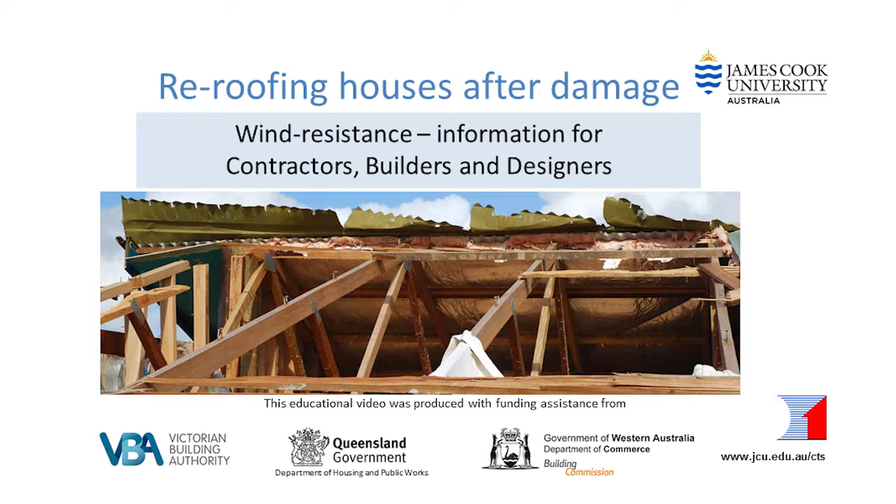Hello. This video gives some guidance on replacing roofs that have been damaged in a wind event in any part of Australia. In almost every case where the roof has been damaged due to wind, the primary cause is more to do with the weakness of the roof and the roof structure than the strength of the wind itself.

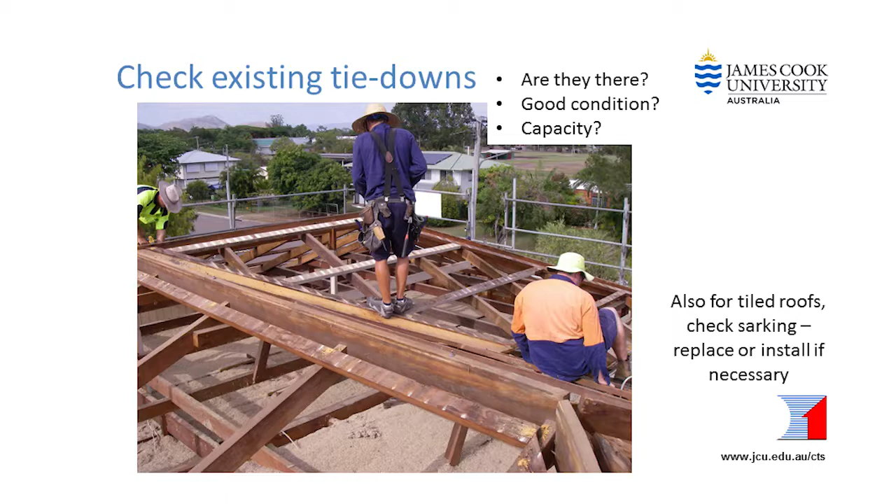So after the roof has been damaged is the perfect time to have a look at what is underneath the roofing and make sure that all the tie downs will do their job properly next time the wind really hammers that roof. If the roof hasn't performed well enough already, there's no point putting back the same details. It has to be upgraded.

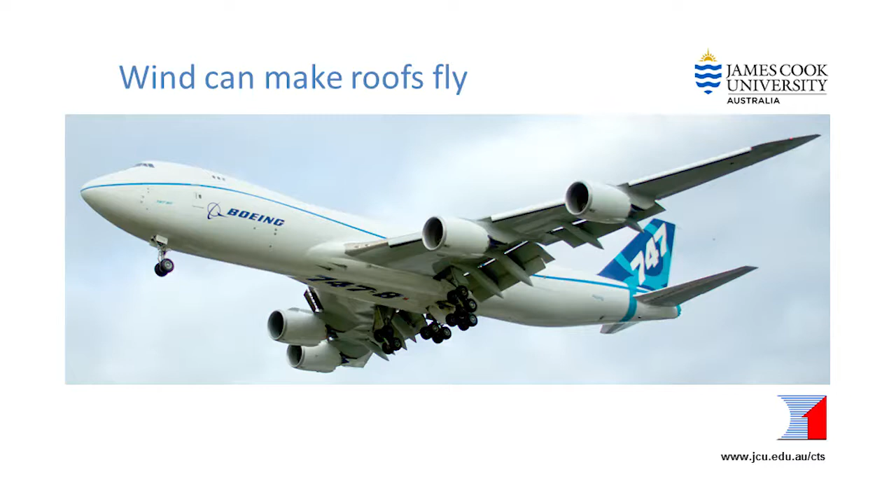Let's think about the loads that the wind can put on a roof. This 370-ton plane flies because of what happens to the airflow over the wings. As the wing rushes through the air like this, some air gets pushed down by the underside. That gives a little bit of lift. But really exciting things happen on the upper surface of the wing.

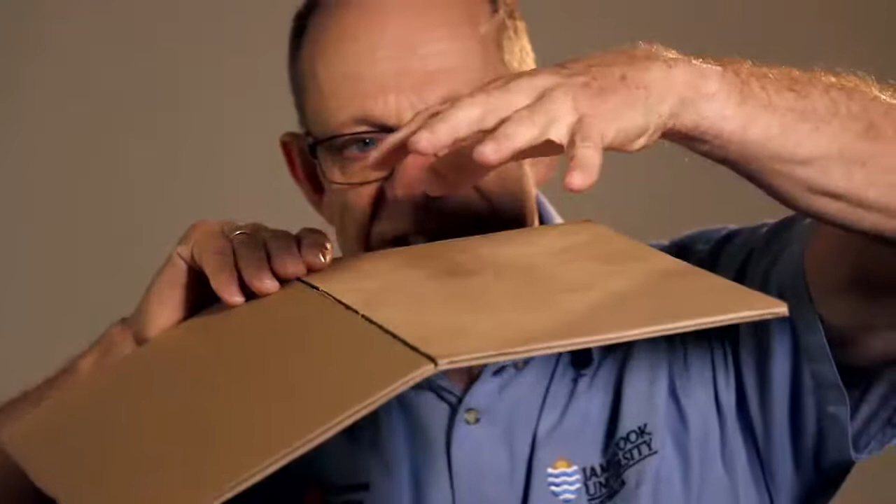As the front of the wing pushes air molecules up and out of the way, the wing moves into the space where they used to be. Now there is nothing on the upper surface of the wing. This nothing is actually suction, which lifts the plane into the air.

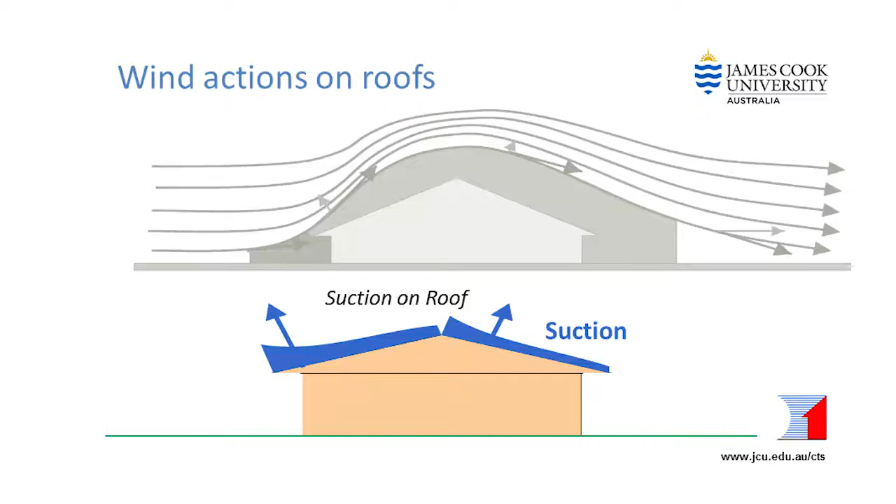Aerodynamically, the same thing happens to a roof that is stationary while the wind is rushing past it. As the wind hits the house and goes up and over the top of the roof, it sucks out air above the roof, and that creates suction on the roof. These suction forces are highest on the edge and near the ridge of the roof. So those are the areas that need the extra anchorage.

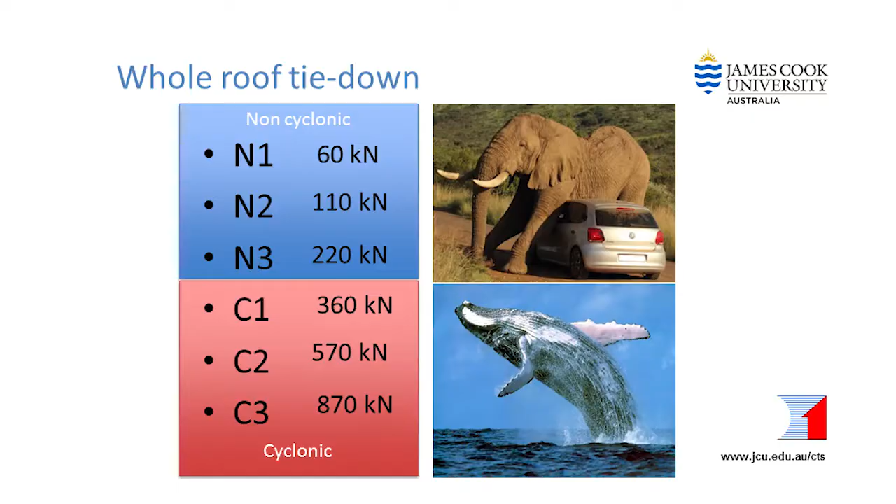Wind can exert several tons of force onto the roof of a house. So if we were only using weight to hold the roof down, we would need to park the equivalent of one or more elephants on the roof in non-cyclonic areas and a whale on the roof in cyclonic areas. Obviously we can't do that, but there are tons underneath the roof and we can tie the roof down using the weight of the whole house.

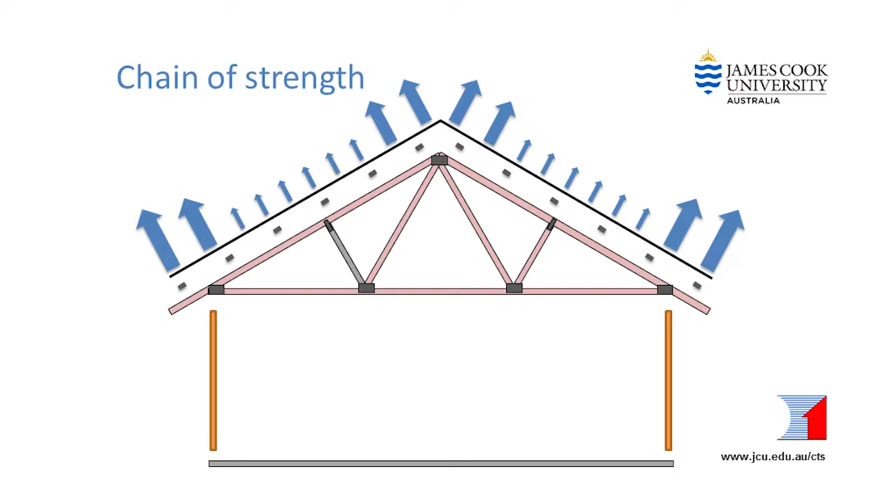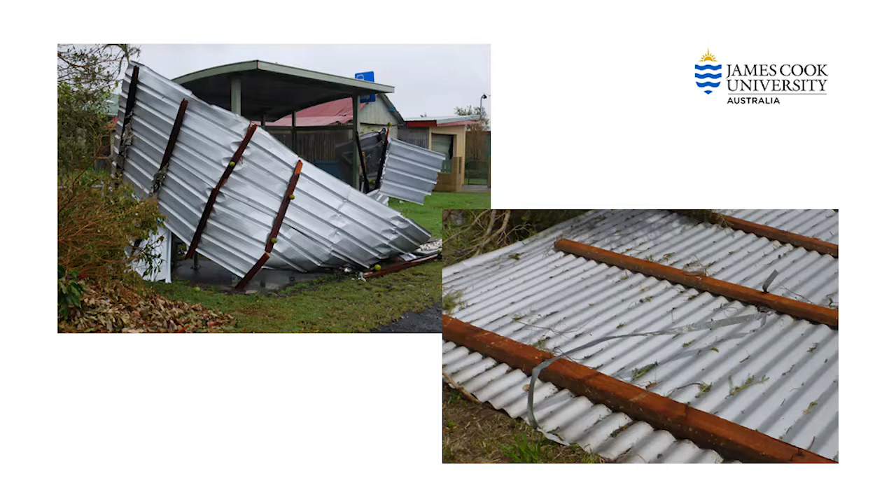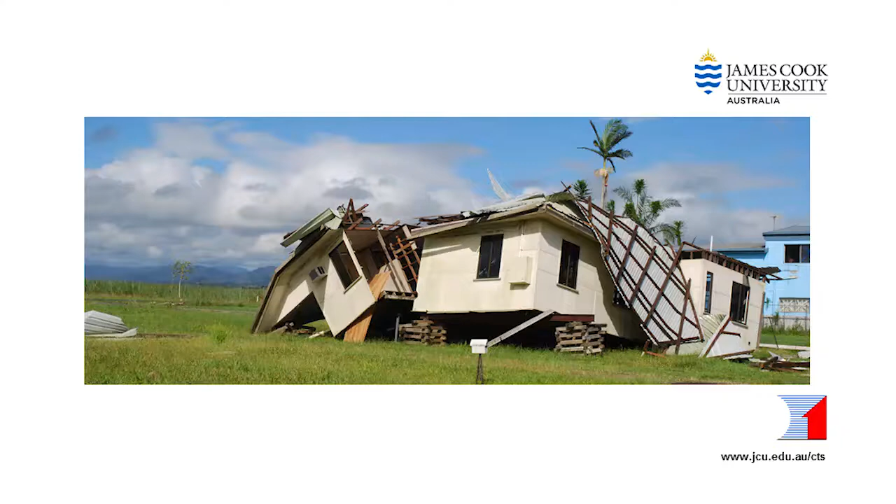But then the battens need to be tied down to the rafters or the trusses, and then the trusses have to be tied down to the walls, and the walls have to be tied down to the floor, and the whole house anchored strongly to the ground. The most important task is to tie the roofing and the whole roof structure to the walls. While the roofing is off, it is possible to see what is holding down the battens and the rafters or trusses. And if the existing connections aren't good enough, they can be replaced at that time.

In order to determine the tie down required, you need to check the site wind classification for the building, which gives an indication of how fast the wind is going to be hitting that particular site in a design wind event. In some cases, the owner may know the site wind classification from the plans, but if not, you can use the standard AS4055 Wind Loads for Housing to determine the classification.

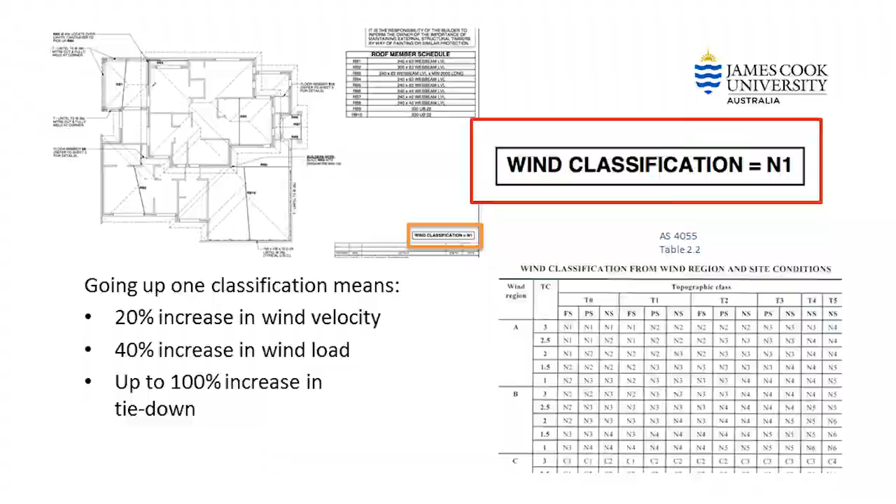It's particularly important to get this right, because if the tie downs are sized using a classification that is too low, then they will be severely overstressed. So if there's any doubt at all about the correct site classification, it's always wise to use the higher classification. The first step in working out the wind classification is to use figure 2.1 in AS4055, which tells you which region the site is in. For example, Brisbane is in wind region B.

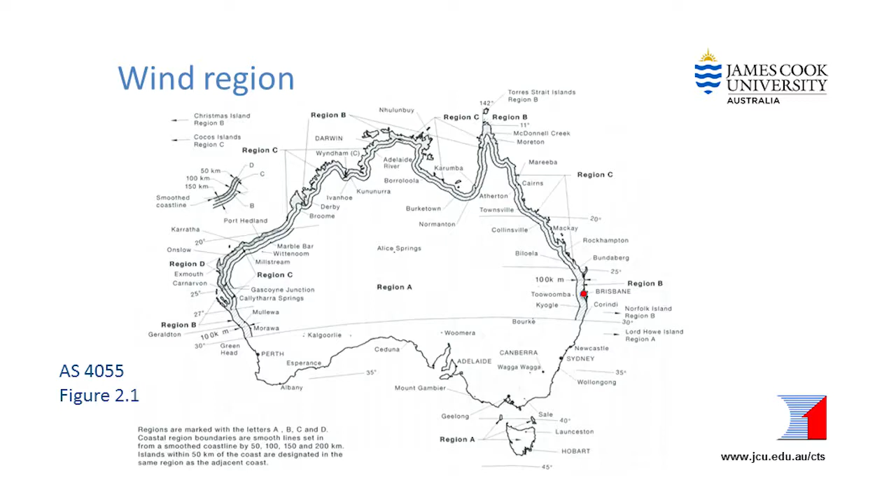The next step is to look at the terrain within 500 metres of the site. Google Earth is ideal for doing this. The most open terrain within the circle is the value you use. For this example, the site is surrounded by suburban lots and all of the land in the circle is terrain category 3. Next, check whether the house has any shielding. 2 rows of houses on all sides are required for full shielding.

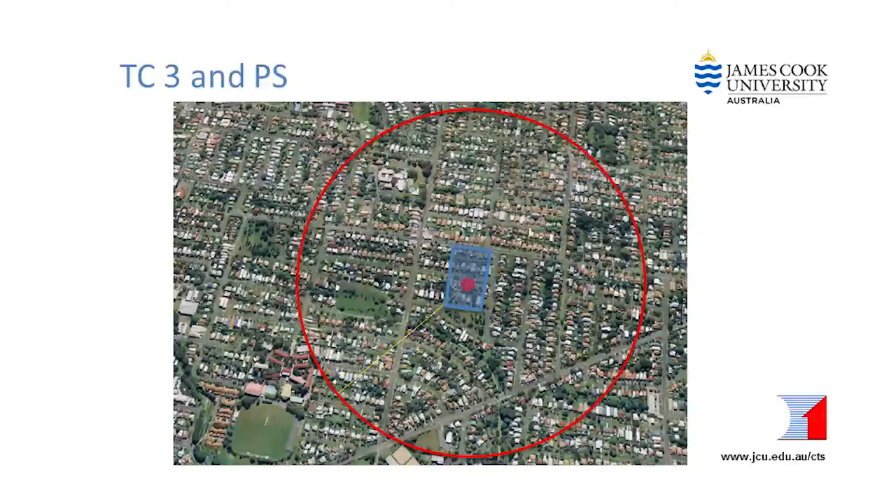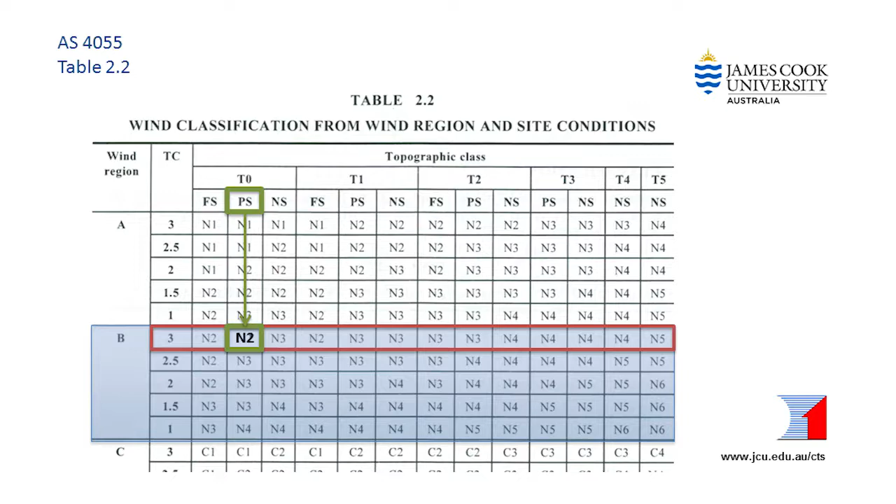In this example, there's only 1 row of houses providing shielding on the south side, so it's classified as partially shielded. Finally, the topography has to be checked, and often a site visit is necessary. In this example, the house is on flat land, so the topography classification is T0. All these classifications are used together in Table 2.2 in AS4055 to provide the appropriate wind classification for a particular site.

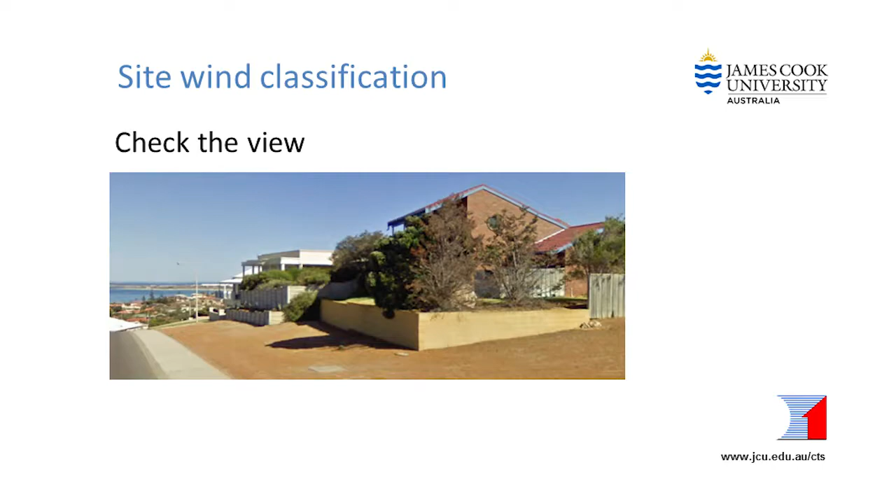However, as a general rule of thumb, if a house has good views, it's going to have a higher wind classification. The Region B house in this picture would be considered N3 on flat land, but because it's built at the top of a steep hill, it's actually N5. So while you're quoting on the re-roofing job, check the view from the roof. If you have a really good view, you know you are going to have to use substantial tie downs to ensure that the roof is properly secured, which may affect the price of the job.

Different site wind classifications require different tie down connections. Also, the highly loaded areas around the edges and ridges require stronger tie downs than the general areas of the roof. For housing, the outside 1200 millimetres of each panel is considered to be an edge region. This takes in at least 2 battens at the eaves and the ridge.

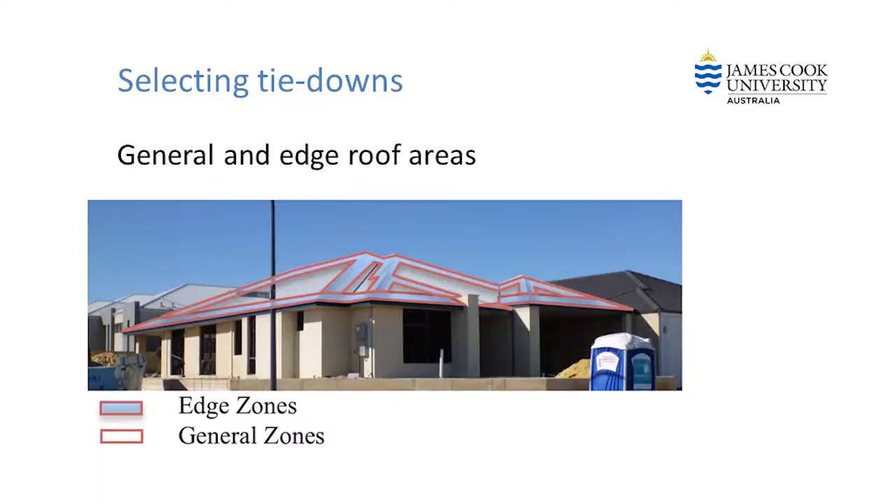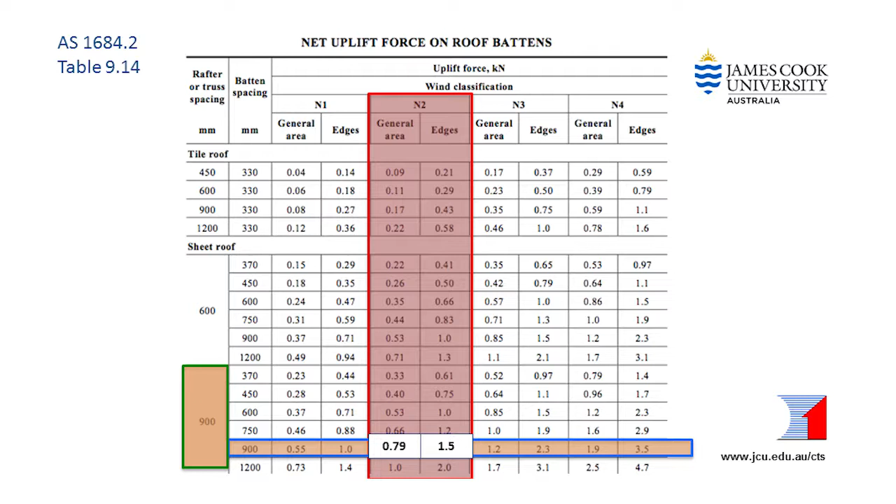You can determine what tie downs are needed from a number of different sources. The roofing manufacturer will tell you the anchorages you need to connect the roofing itself to the battens. Batten manufacturers often specify the connections required for their products to tie them to trusses, and truss manufacturers should give details for tying down the trusses. If these details are not available from the manufacturers, you can use AS 1684 for timber and the NASH standard for steel to match the site wind classification to the loads required. Other tables in the same documents give you the tie downs needed.

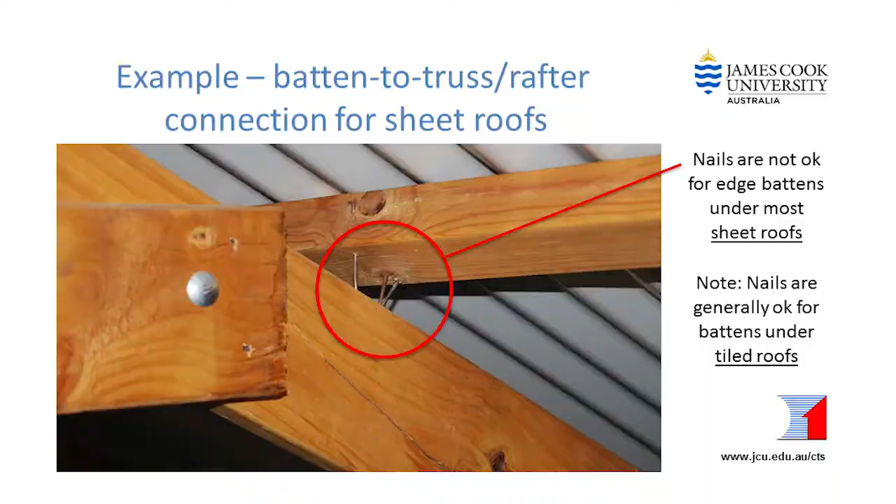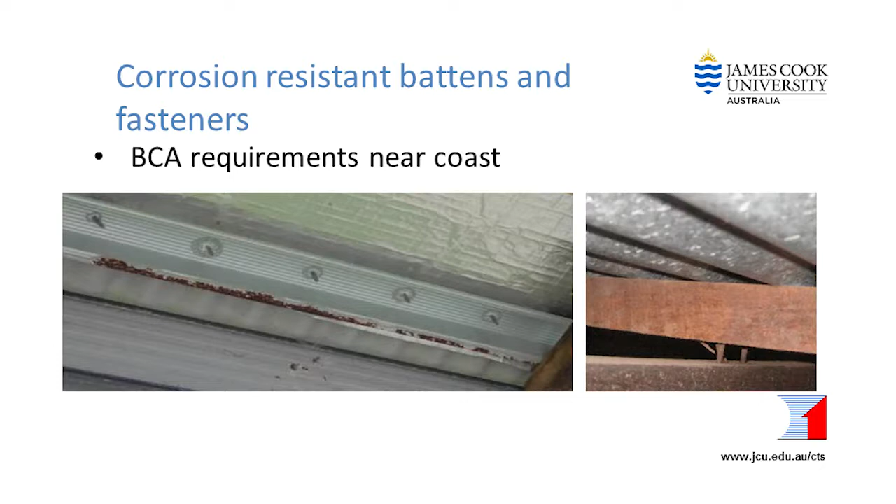We have learned from damage investigations that nails on their own don't have enough strength to hold down edge and ridge battens against wind loads in almost any part of Australia. So if you see battens fastened with nails, some extra fixings will be required. Many older roofs have hardwood battens or trusses, so to prevent splitting, it may be a good investment of time to pre-drill seasoned hardwoods before driving any screws in. Also, in coastal areas, the BCA has special requirements for corrosion resistance for all structural elements, including battens and fasteners where they're exposed to the sea air.

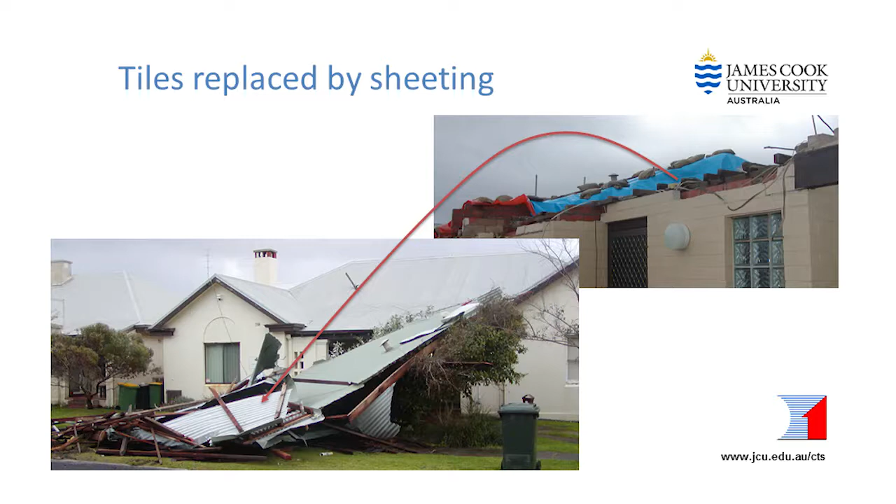The client may ask you to change the type of roofing material. For example, sheet roof replaced with tiles or vice versa. Most states and territories require building approval for any change of roofing material. If changing from a light to a heavier material, the ability of the structure to support the increased weight will need to be assessed. However, if changing from a heavy to a lighter material, review all materials and tie downs to ensure that they can resist the wind uplift.

There may also be local variations in construction practices that will have to be considered as part of the tie down process. For example, in some cyclone regions in northern WA and some parts of northern Queensland, there may be over-battens on top of the roof sheeting. These have been designed as the main anchorage to tie the roof firmly down to the bottom of the structure. If the over-battens are removed, something else needs to be put in their place that does that job just as effectively. Most of the connections in the roof may also have to be replaced. It is recommended that a full engineering review is conducted if the over-battens are removed.

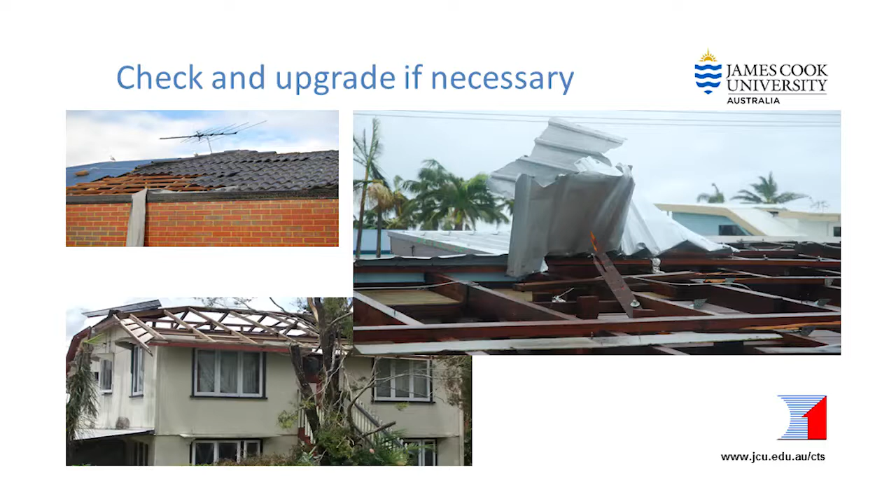If the roof needs replacing as a result of damage during a wind event, it's likely that some part of the roof structure or cladding has a problem and needs to be upgraded to prevent the same thing happening again. The damage to the old roof may offer enough access to the roof structure to assess which components or connections will require upgrading. But it's still important to advise the client that there may be some additional upgrading costs that only become apparent during the replacement process.

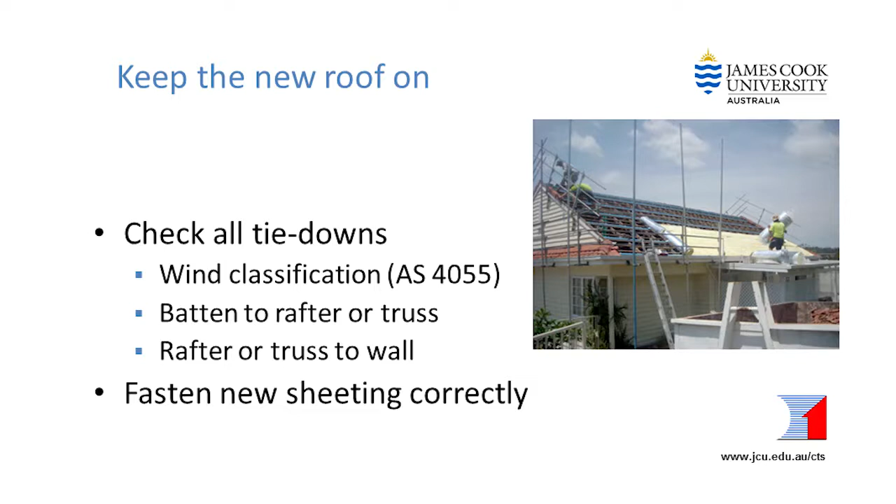As a building professional, you will want to do the best job possible for your clients, and your duty of care is to provide safety and amenity. When all roof connections are checked and upgraded if necessary, you can be confident that the new roof will not only look good, but perform well in strong winds.